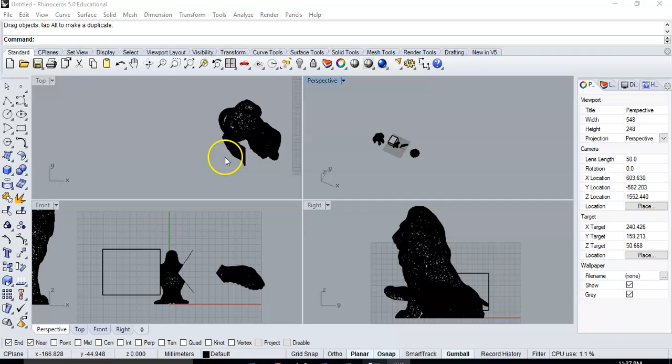Okay, so picking up where I left off, I am going to start rotating this to align with the body of this lion. I'm using gumball just because I find it a lot easier to move objects.

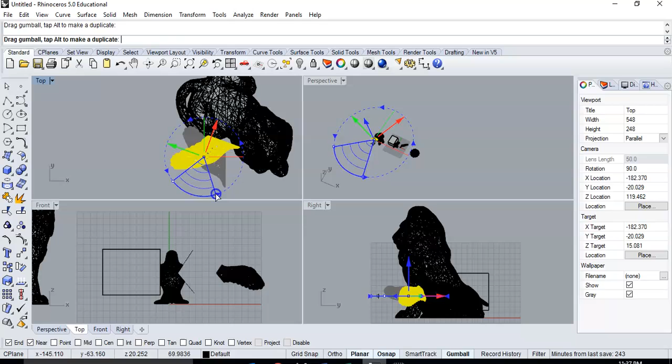And I'm going to go to this screen so I can see where this is sitting, and this is very clearly not sitting anywhere close to where I want it. It's sitting way down low, and this is clearly going to have to angle a little bit back.

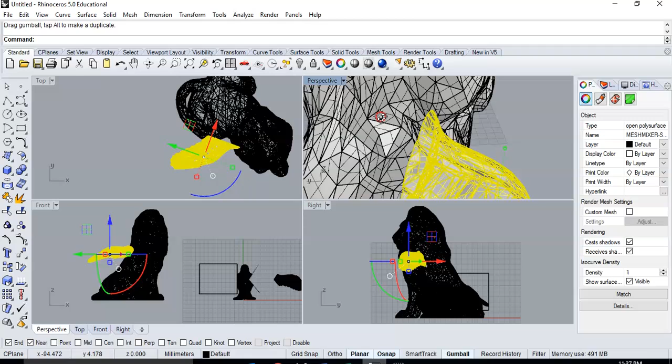So I'm going to start doing this. I do want this object to actually end up overlapping with the body of the lion. If it does not overlap at all, it will not join.

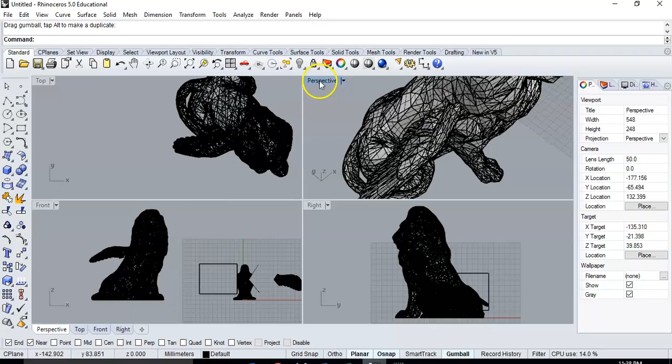So I'm going to bring the perspective view up. I'm going to look here, and then I'm going to start shifting over. Okay, and we're starting to merge in.

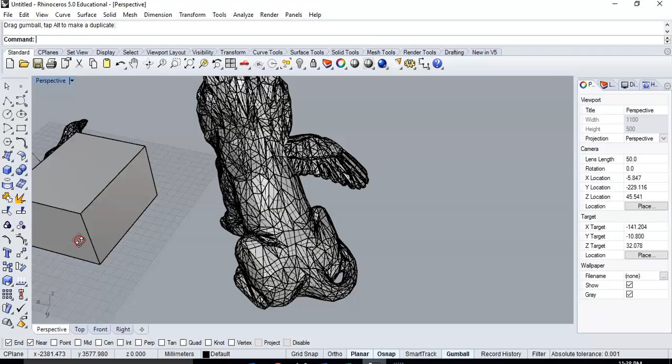Right, so there I have a wing nearly all the way embedded into this. I should have probably trimmed a little bit more of this and brought a little more with it, but for today's purposes we'll make it work.

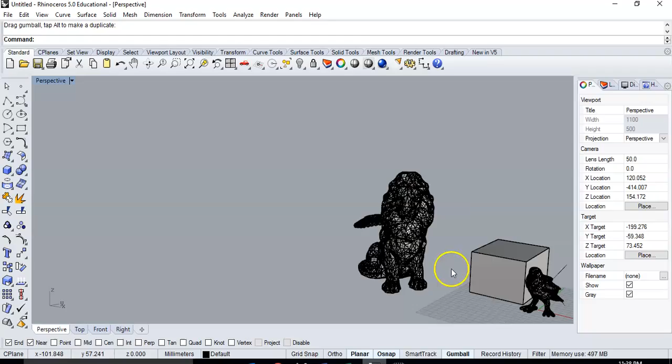So I could go back and cut out the other wing off of the bird, although I've already trimmed it off in a way that's not going to work very well. So what I'm actually going to do is mirror this on the other side.

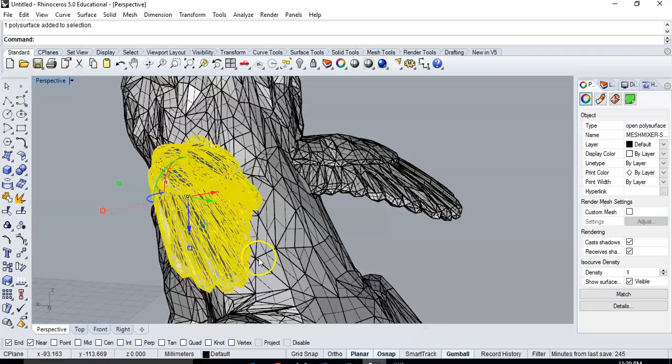I'm going to take a look at this, and that actually did quite good. I am going to have to move this in just a little bit.

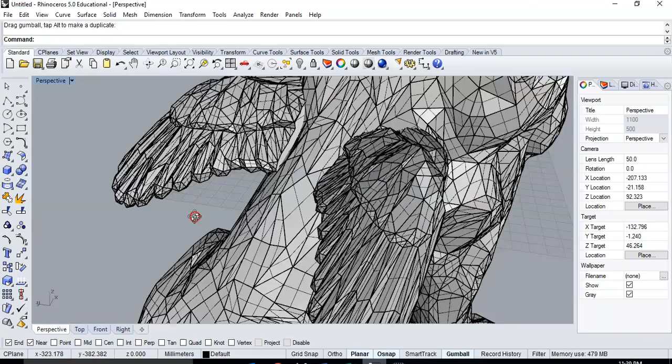And I'm going to try to rotate this down just a little bit to change the angle of it slightly, and I'm going to move it down just a bit, and move it in here.

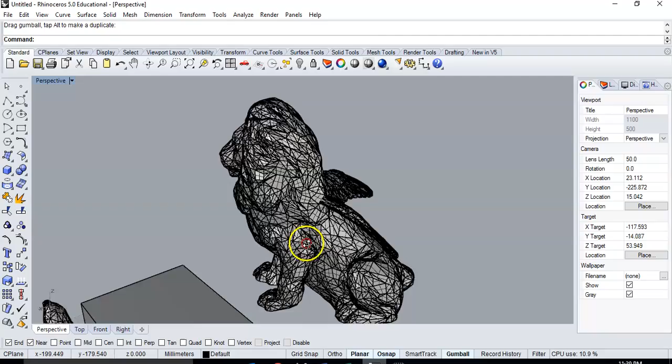Alright, so now my lion has wings. They are tiny little Cupid wings, not very functional, but for the sake of looks, it works just fine.

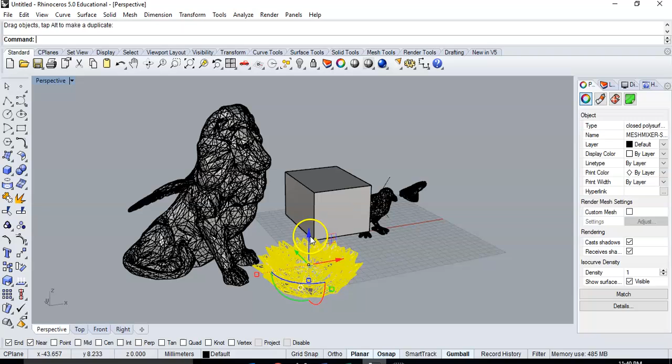So at this point I would probably save my project, and then I am just going to add this to my object. I am going to kind of use this as a crown.

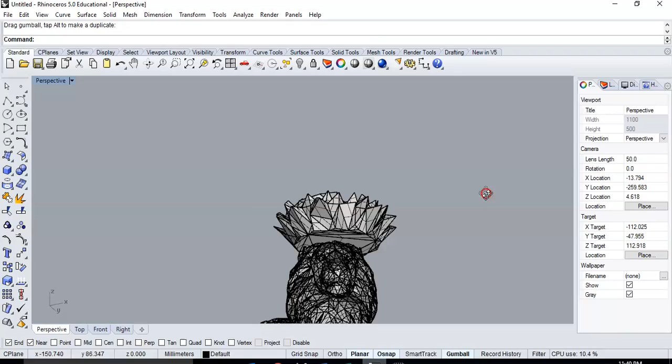Or my thought was to either use this as a crown or use it as a sort of replacement mane. It kind of creates a funky little straw hat-like thing.

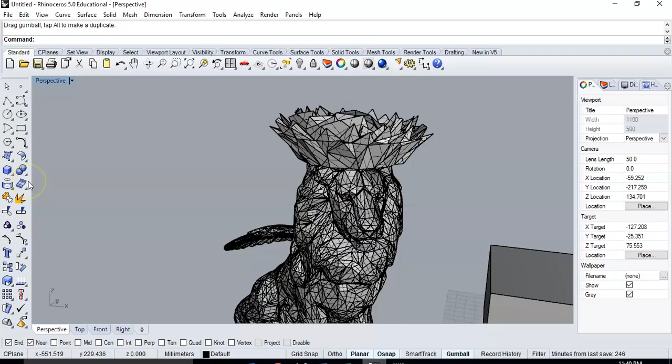So, if I wanted to, at this point, then I could just Boolean union those together. Don't try to join, use Boolean union.

For the sake of it, I'm going to rotate this and give him sort of a flower mane, just to try it another way.

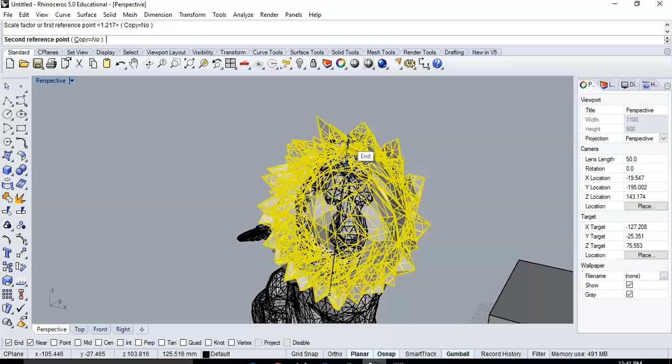Obviously, that is way too small, so I'm going to scale this. Not to the size of half of my screen.

I'm going to go over to another viewport. If it wants to do strange things for you, switch to another viewport, and that usually helps resolve them.

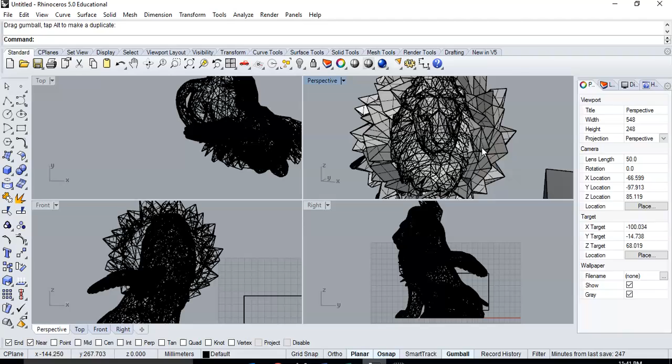I'm going to move that. I clearly need to rotate this a little bit.

And I'm going to just kind of fuss with this until I'm happy with it. I'm going to move it forward so it takes precedence over the rest of the mane.

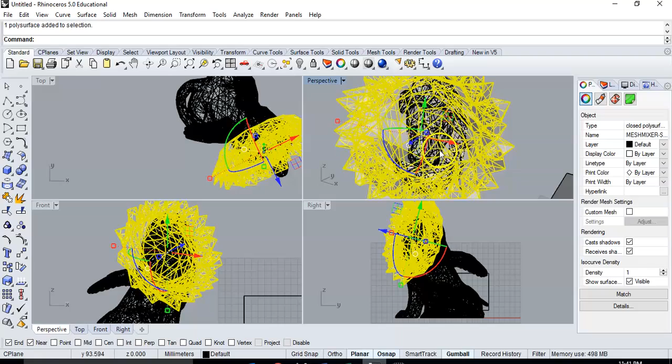Although I may not like that because it brings that circle forward, so I guess I'm going to move it back again. And with this particular project, it's more about how you put the parts together in an interesting way.

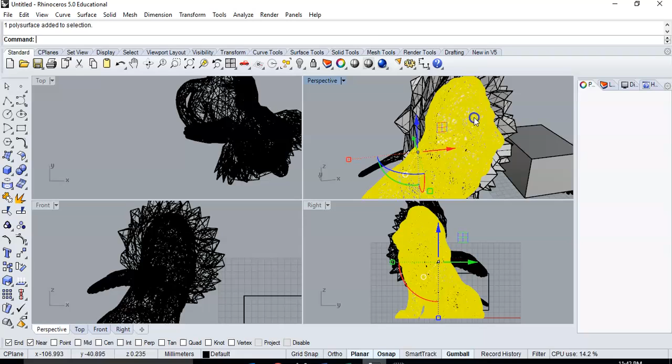Make sure your object is fully closed at the end. And I'm going to show you what happens with this.

I am going to try to Boolean union. I am not going to try to Boolean all of the pieces at once. I will freeze my computer if I do that.

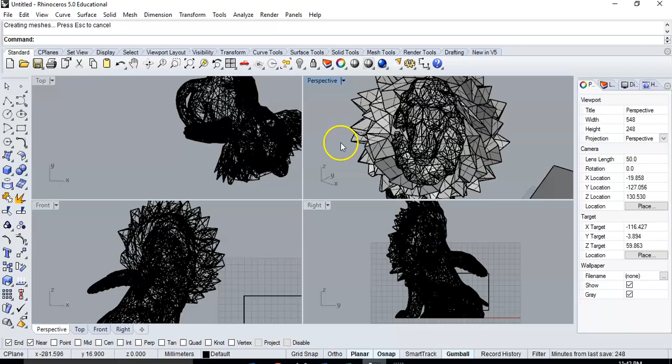So take your time and add what you need, but don't be crashing your computer.

So now, if I zoom in on this perspective mode, I'm going to change my view to be rendered, and I now have a lion with cupid wings and a sort of flower surround on its head.

So the key is more in making sure you divide things at points that make sense. Make sure your objects overlap and are all closed.

If they aren't fully closed, you can still join things together, but you have to trim the other object in order to actually get that to work properly.

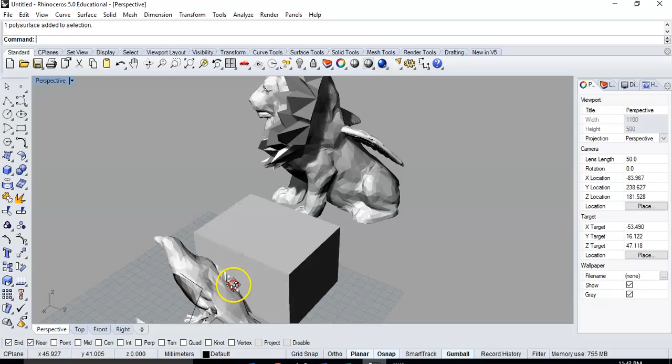And actually, to show you how that would work, I'm going to do that really quick. I'm just going to use this other sort of wing. I'm going to put it in a place that doesn't make any sense whatsoever, but this is just for demonstration.

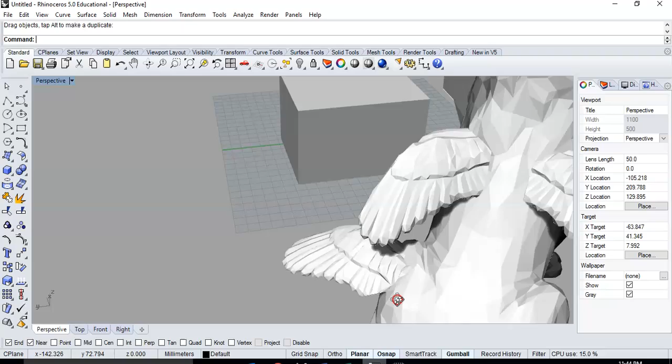Provided I don't actually completely lose this in the other object. Okay, so you can see that it's sort of in between in the other object. It's not quite all the way there.

So I'm going to fuss with this until it actually fully meets the other object. So what I could do now is I can select this larger object I'm going to merge it with, and I can split it by this object.

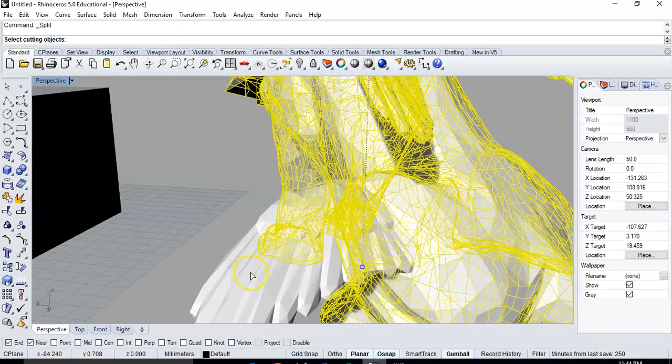Or at least in theory, you should be able to split it by this object. Okay, that one trimmed. So now let's try this one again.

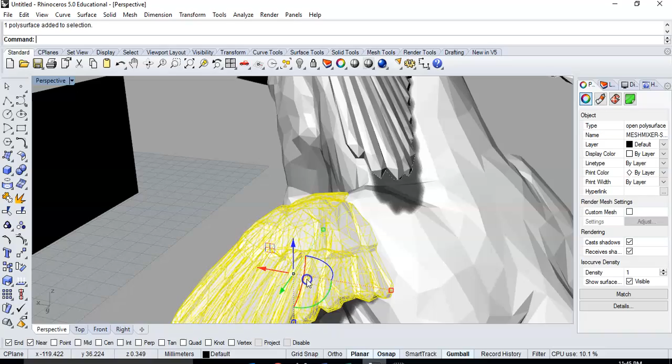Okay, for some reason, this particular object does not like to be trimmed by the other one, but in theory, that should actually trim. And then you should just be able to join the two pieces together. This is why doing Booleaning rather than joining is a lot easier.